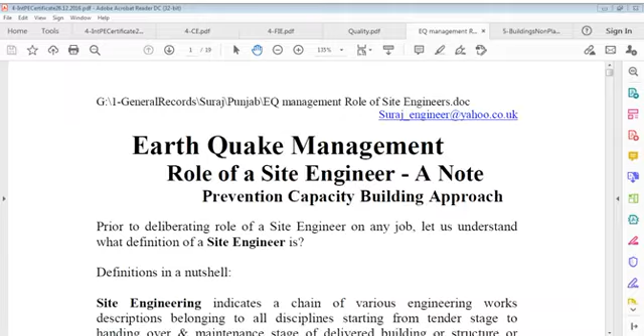We have certificates of all sorts, as I showed - this high profile certificate - and we claim that we are, but we are not. And we claim that we have certain roles in life, we dispose those roles, but should we, or do we? And of course, structures and buildings and all that.

This goes on and on, on and on. And like this, life keeps on moving on tracks of quality or no quality. That is a different aspect of life.

When I say quality, and when I say designs, and of course construction - so quality, design, construction. Do you think quality is available only in construction, or should it be available in construction, or should it be part of our life?

Construction, methods, time, performance. Methods - expressed detail, format for performance. Time - unchangeable. Cost - it may vary. Risks can be and must be foreseen. Reliability requires to be achieved.

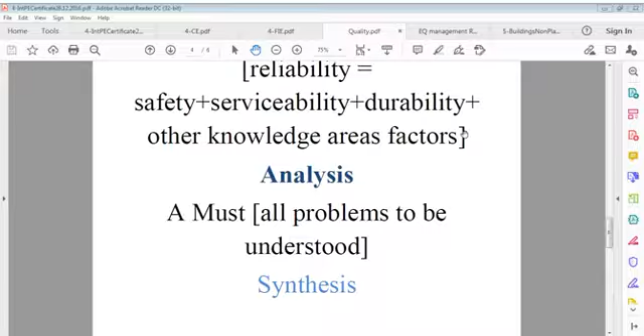But doctor cannot justify how could this respiration stop? How could this soul stop? No doctor can, no medical world can answer to this question. This means complete quality is unknown.

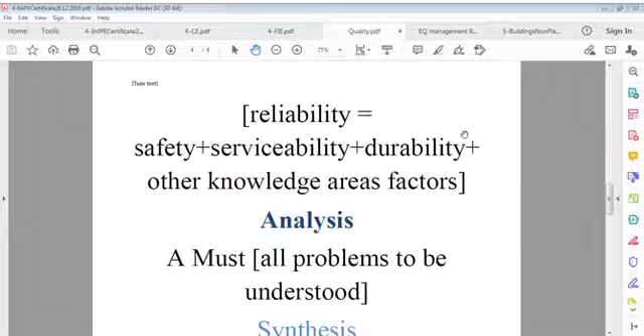If we can't analyze - we can analyze, but we cannot synthesize that. Doctor, medical world can analyze your body, everything it can do by testing, but it can't tell the answer. Can some doctor assemble this body? Answer is no.

Because it is not in the ambit of doctor or medical world that body can be revived. And body and doctor also cannot tell you what does that mean. No one can answer this question, because there is no meaning until we know that, we understand that.

We simply say, these test reports tell there is nothing in this. Breath has stopped, heart has stopped, there is multi-organ failure like this or like that. And body ceases functioning.

You can imagine by this what cost we have with us. Without payment, we have this value that God has given us. Risks and reliability both are there. If my body is healthy, it's risk-free, it works well, and it's reliable.

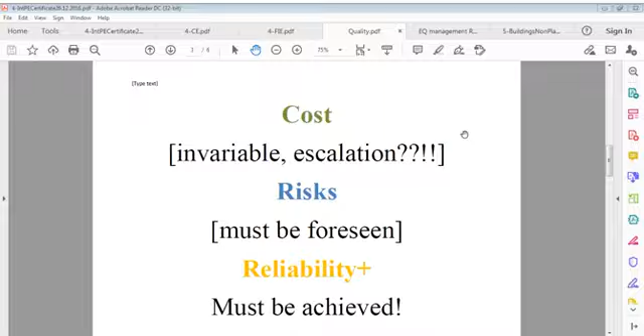That's a very important point. But we do not know the method by which this body was constructed. It's really very interesting to know how this body is constructed, using which design and under what quality system, which we can't know. I'm just giving you this based on only my thoughts of life. It's only based on thinking. Otherwise, I can't tell you. It's a very important point.

In the engineering world, a lot has happened in all branches of engineering that we name. When I was young, I did not know what engineering was, but I knew there were few engineerings at that time. Usually, an engineer was understood to be a person who produces houses or machines, or deals with electrical power. There were three engineerings: electrical, mechanical, and civil. Other engineering names were not known in those days. Later came automobile engineering, television engineering - we used to call them TV engineer, mechanic, all that type.

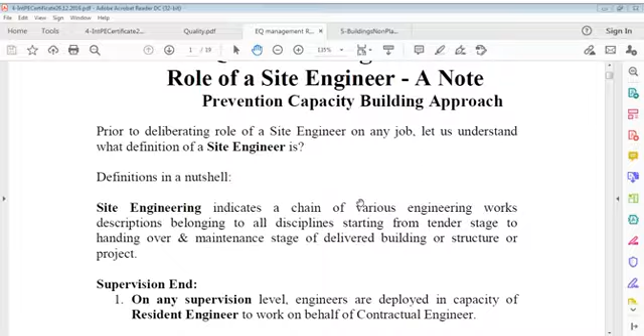The subject is different. I say, prior to deliberating the role of a site engineer on whatever job, we should know actually what is a site engineer. Is it the same term we use, or is it different? Just like we say engineer and engineering - what actually is a site engineer?

I can say you may say a person who works on site is a site engineer. You may say a person who develops is a site engineer. Yes, it can be. But I think site engineering indicates a chain of various engineering works.

Various engineering works, descriptions belonging to all disciplines, starting from the bidding stage or tender stage to the handing over and maintenance stage of a delivered building or structure or project.

It's like a workshop - you can say floor manager, floor engineer, who takes responsibility of completing all activities of floor work. You may say that site means a place. That's right, site means a place. We can with complete competency say that site is a location, a piece of land, a place. That's right. This means where work is done, that is site.

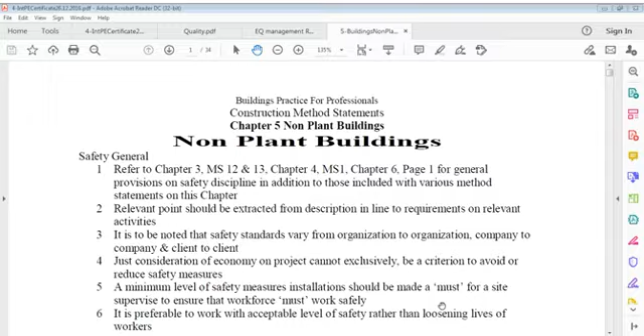We have to be very clear. Responsibilities, of course, do change, and we have to understand those responsibilities. What actually changes? We sometimes call them non-plant buildings, sometimes plant buildings. It happens, and no one can change it. It's not one, not two, but many roles are involved in those buildings.

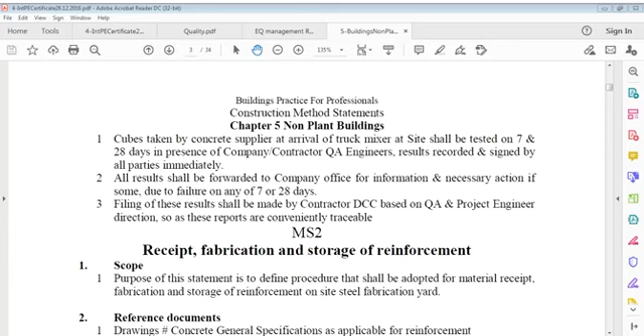No, I'm just saying supervision role and contractual engineer role, and also the construction end. Certainly there are two points in any work: one is construction, the other is supervision. Of course, on top of this, or before this, prior to construction, we have to design every project, without which the project cannot be started.

That design is a role of the engineer. It's a complete role of engineer, but here the design is to be implemented on site, and we call it design engineering work. Design engineering means it's pre-work of site engineering, but it's a part of site engineering itself, because without this, site engineering cannot go. You may say design is a lead engineering of site engineering. Design leads how to work on site, and without designs we can't do anything. That's also true. So design engineering is a role of site engineering.

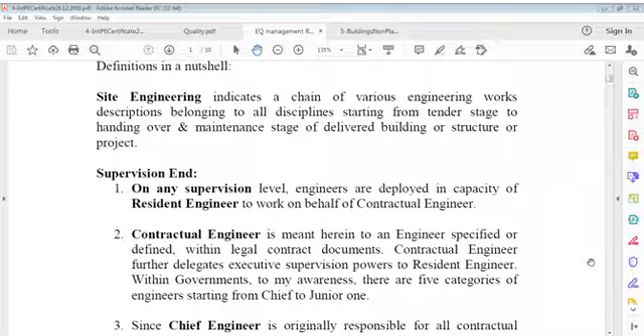When surveillance comes into picture, that is not that high a responsibility. But when supervision comes into picture, that is absolute responsibility. Of course, in work, not in contract. I'm not talking of contract here. I'm talking of responsible conduct, responsible behavior, which is a very important part of life. If I understand what is my responsibility and what is the responsibility of others, we can enhance our responsibility, we enlarge it, keeping abreast of project value.

It is, of course, responsibilities we define ourselves. Nobody else defines them. Therefore, that responsibility can be enlarged in the interest of work. As a supervisor, or as a higher responsibility person, it's my duty to make sure that whatever work we do, or the contractor does, must be more than in quality, enriched and delivered more than what we expect for.

But does it happen? If that could be so easy, there should be no such problem in quality. There should be no such problem at any level of quality. But it doesn't happen. This doesn't happen, and that's the point where we are weak.

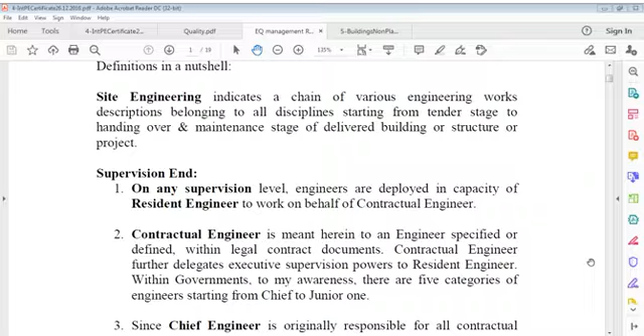When I say supervision, what does it mean? It means I am an engineer who has to make sure whatever someone else does is acceptable. That's what I think. It means I am a little competent, I have some degree of competency to decide that whatever I get, whatever work is done, that is appropriate. That's all supervision means.

This means that although it's not my responsibility, yet I can say, yes, this person has done all this work on site, and it complies with all requirements, meaning the activity, whatever is done, complies with the definitions, with extensions of definitions included in documents, or you can say drawings and specifications. That's what I make sure. And if it's not given, it has been done according to the good or prevailing industrial practice.

And when I say that's my job to do like this, I have to report this to my real supervisor, my absolute supervisor. I'm a relative supervisor, I'm a delegated supervisor, but my original supervisor, who is responsible for this design, for this project, is responsible to make sure whatever is spent on this project is really brought back in terms of quality of work, quantity of work, to whom we generally call, contractually, the engineer, who is responsible for the complete project, complete structure.

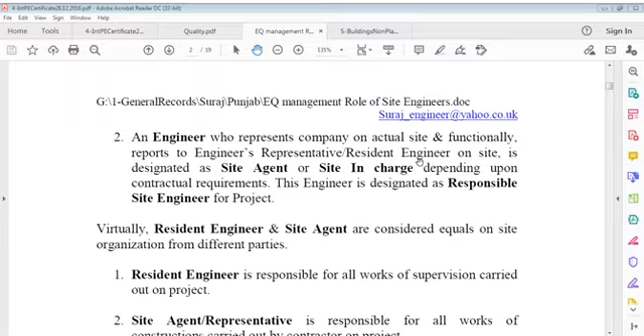Here I'm not talking of titles we give to such people - I'm talking of responsibilities. Just like on the construction end, project manager, leader or engineer, downwards to all levels, up to foreman, supervisor, and charge hand, working in whatever construction contracting company - these designations are factually responsible for achievement of project construction execution.

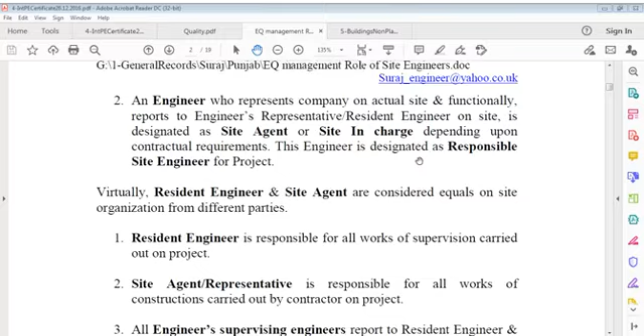Engineer - an engineer who represents the company or organization on the real site, the actual site, and functionally reports to the engineer's representative or resident engineer. I'm talking of that person who works on behalf of the contractor. Certainly that person is the site representative of the contractor, and that person must report to the representative of the site.

That person who has such high profile on behalf of the contractor can be called site agent or site in charge, depending on what's practice and what's required by the contract. The term doesn't matter - responsibility matters. Generally we call it the responsible site engineer or site agent.

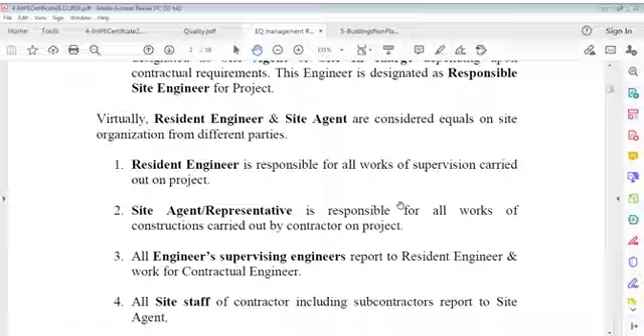Construction is very complicated nowadays, and most important is the element of RCC, reinforcement concrete. You can say for accomplishing RCC, which is in foundation as well, knowledge of existing soil formation strata and below many stratas counts a lot in implementation of such requirements.

Concrete is a material that can't be controlled chip by chip, stone by stone, or particle by particle. Reason we know - thunderstorms everywhere sometimes, floods everywhere sometimes, or even bombing by those who are against humanity. We have to realize this fact. We have to evaluate this fact.

Cost, time are spent, and if quality is not achieved, what is the value of being an engineer? There is no value of being an engineer. It is the duty of the site person to leave no stone unturned while doing work and complying with the requirement of designs. The best person is one who delivers more than expected.

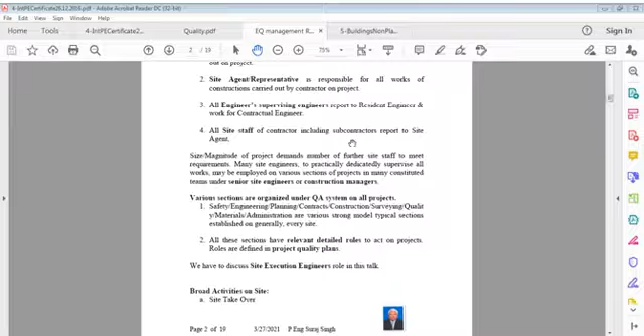Site construction is really an extraordinary understanding. If you understand this extraordinarily, we can get a lot. We can get many answers, many views on this.

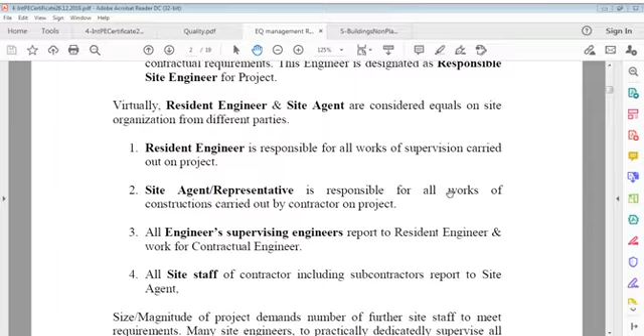And here, what we said -- these are very important factors, considerations. We can see various levels of engineers are involved in that, but my point is not that. It's a different kind of consideration, a different kind of view.

Roles are defined in project quality plans, and we have to discuss those roles in our talk. Now we know that every project involves planning, mobilization, surveying.

This is very important: planning, mobilization, surveying, start, kick-off, construction, quality supervision, completion, maintenance. Planning -- now planning has also got many meanings.

Site planning we are talking of. We are not talking of national planning or international planning, or you can say budget planning or something. We are talking of site planning, construction planning, and that means mobilization exists, surveying, start, kick-off, construction.

Construction is a very long process. Quality supervision, completion, maintenance -- we can say all this.

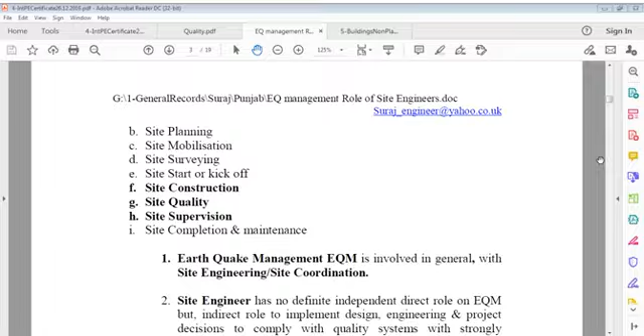And earthquake is just a title here because there's rules in that talk. It's site engineering coordination, and we can say site engineer means has no definite independent direct role, but an indirect role.

To implement design, engineering, project decisions, to comply with quality systems, with strongly extended base support by all responsible discipline sections. It's a very important point. We can't go against that.

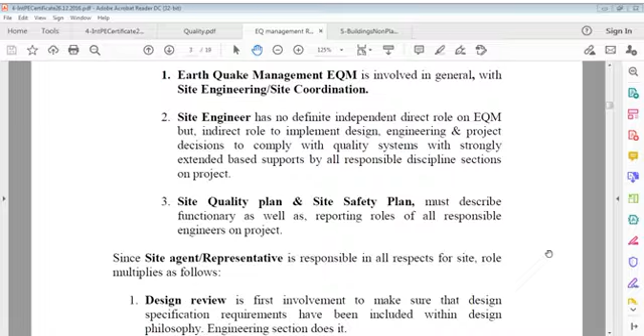Now, site quality plan, site safety plan must describe functionary as well as reporting roles of all responsible engineers on the project.

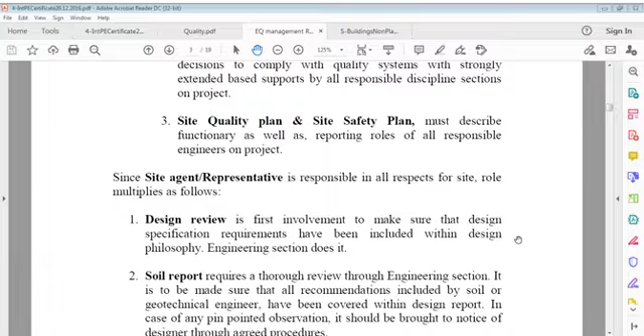Site quality plan and site safety plan must describe functionary as well as reporting roles of all responsible engineers on the project.

Now let us say design review, which is a job of site as well. They are responsible engineers deployed on site. Review is the first involvement to make sure that design specifications and requirements have been included within the design philosophy.

Engineering design section does it. It doesn't mean we have to check design's theories or design's application analysis. It's not that. Design review doesn't mean that. Design review means a kind of study in which we have to make sure there's nothing left in this without which construction cannot be done.

And of course, to make sure that it's acceptable in a way -- you can say it may be structural steel, it may be RCC, or it may be whatever else -- there's no problem in constructing that.

No major problem is caused. It doesn't mean we are doing scrutiny, or proof surveying, or proofreading. It's not that. It's a review, a coordination review, you can say, a coordination review.

We're not going to check what the design has done, but to make sure we should not face any specific difficulty that can stop work, that can cause hindrance in pushing the job.

That's the kind of study, because we don't have details of designs with us. We don't have those stress analyses, and we are not interested in that as well.

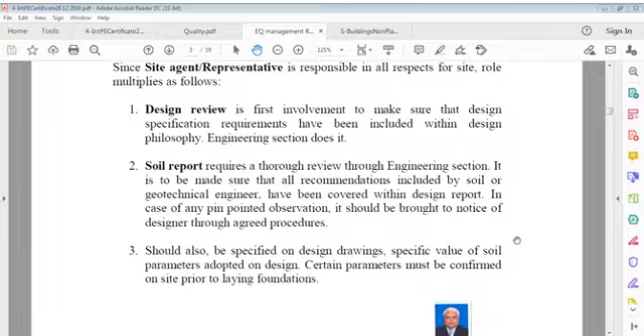It's to make sure that all recommendations included by the soil or geotechnical engineer have been covered within the design report. In case of whatever pinpointed observation, it should be brought to notice of the designer through agreed procedures. So design review, also soil report review, both are very important. Design has direct relation to soil report as far as foundation is concerned, particularly the foundation portion. And if soil report and site conditions are different, question must be raised.

Sometimes it happens that the soil engineer has not given proper attention. The site person knows there can be a lot of difference, and sometimes it is well done. Whatever happens, if there's a doubt, we shall raise this doubt as a site person to the designer or to the soil engineer and question it. It's a part of coordination, it's not a part of domination.

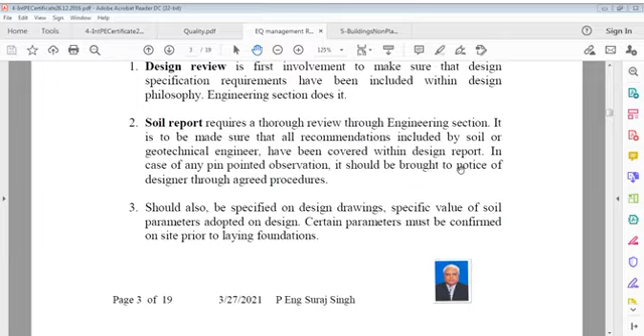Also specified on design drawings, the specific value of soil parameters adopted in design must be verified or confirmed prior to laying foundations. Or in case the localized soil does not allow those design parameters, then a question is raised and the design be reconsidered.

Now the site engineer has to conduct this test in all major areas of site. Site engineer conduct means has to involve in that test with the laboratory, and the site quality engineer must involve for quality accuracy of the test. Whatever variation from the soil report must immediately be reported to the soil laboratory and designer, and it must be the supervisor's or resident engineer's responsibility to make sure that the testing system complies with standard procedures.

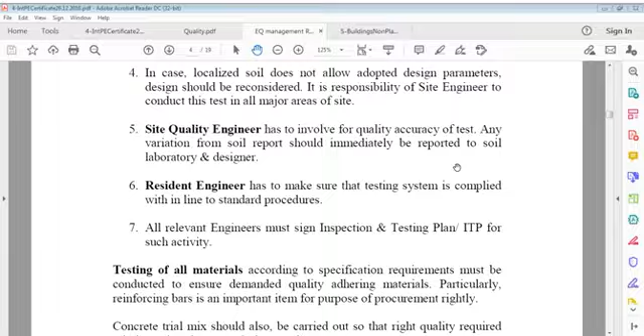Now all materials are tested according to specification requirements, to ensure that quality complies with requirement. Particularly, reinforcing bar is an important item for the purpose of procurement.

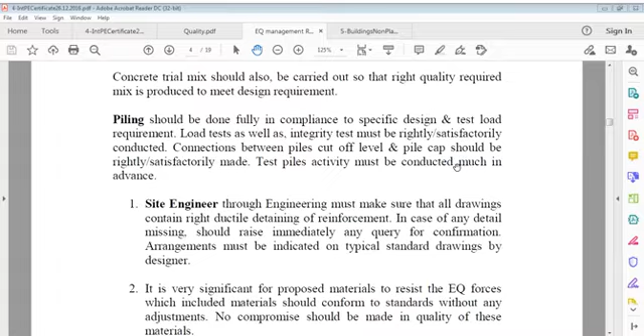Concrete trial mix must be carried out if it is not immediately available. If it's available, that can be considered, but in certain cases, in remote areas, concrete trial mix should be carried out. It takes time, of course, but once it is done, the right quality, required mix, is produced to meet design requirement. Nowadays many projects have been done and many data are available which can be considered if it's a small project or we can't afford a trial mix. But if we can afford it, we should do this. Otherwise, standards are available and we can adopt them.

The issue of piling comes in. It should be done fully in compliance with the specific design and test load requirement. Test loads, load tests, integrity tests, all must be rightly and satisfactorily conducted. Connections between pile cut-off level and pile cap should be rightly and satisfactorily made. And these pile tests must be conducted much in advance.

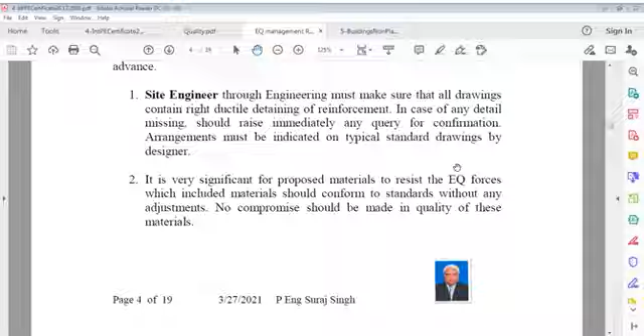Site engineer through engineering must make sure that all drawings contain the right ductile detailing of reinforcement. In case of any detail missing, must raise immediately whatever query for confirmation. Arrangements must be indicated on typical standard drawings by the designer. It's very significant.

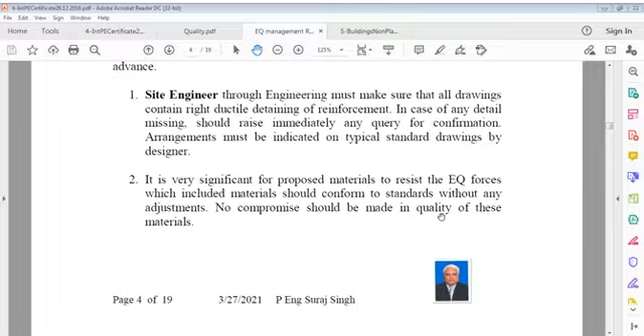For proposed materials to resist earthquake forces, the included materials should conform to standards without any adjustments. No compromise should be made in the quality of these materials. Generally it's RCC that's often included in various buildings and is certainly considered for designs. It's significant to produce concrete works with good quality, and no batch of concrete should be allowed to be poured unsupervised - no batch, even.

We know that every batch of concrete is different. You have to keep that in mind. Though it's from the same batching plant, there can be variations, though within limits. But we must be sure of everything.

It must be ensured that whatever precautions are required to be taken on site should have been explained to all responsible skilled craftspersons as well as those leading at the front.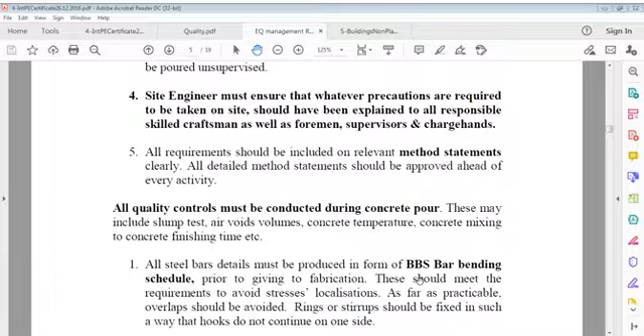All requirements should be included on method statements explicitly and clearly. All detailed method statements should be approved prior to ongoing activities, ahead of every activity.

All quality controls must be conducted during concrete pour. These may include slump test, air voids volumes, concrete temperature, concrete mixing to concrete finishing time, and whatever else is required.

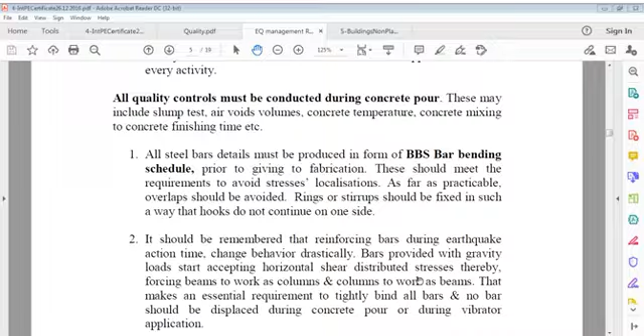All steel bar details must be produced in the form of BBS prior to giving to fabrication. Whatever BBS you use - BS 8666, BS 4466, or your own - depending on your choice or work practice, that must be known to all fabricators, prior to giving to fabrication.

These should meet requirements to avoid stress localizations, that you have to decide. As far as practicable, overlap should be avoided. Rings or stirrups should be fixed in such a way that hooks do not continue on one side as precautionary measures.

It should be remembered that reinforcing bars during earthquake action time change behavior drastically, because the force of earthquake doesn't come vertically alone, it acts in all directions. Bars provided for gravity loads start accepting horizontal shear, though it's not 100%, maybe 25% of vertical load, distributing stresses thereby, because the horizontal seismic action generally goes up to 0.25 of direct weight, equivalent I can say, not exactly.

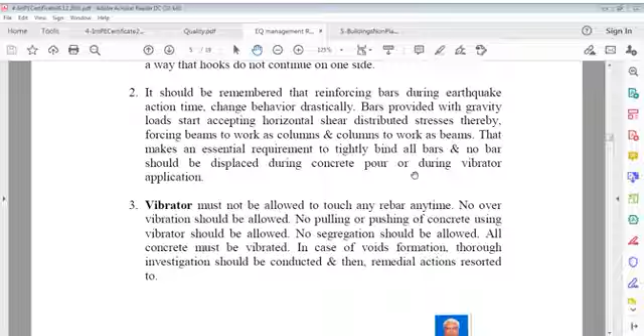It should be freely used without touching any other material. The vibrator must not be allowed to touch any rebar at any time. No over-vibration is accepted, no pulling or pushing of concrete is accepted, no segregation is allowed - all concrete must be vibrated. In case of voids or void formation, a thorough investigation should be conducted, and then remedial action resorted to.

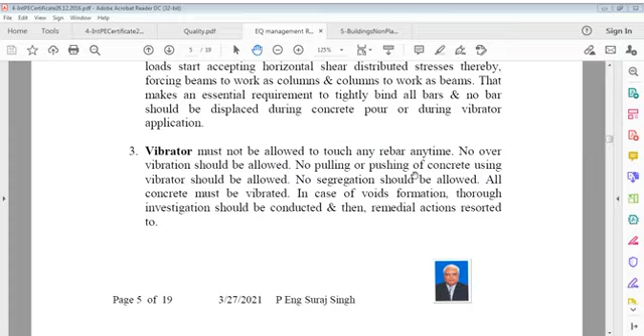Proper inclusion of concrete spacers, which we call covers, should be made at the right locations. Rebars must keep intact during the pouring activity, that must be kept in mind - reinforcing bars remaining intact during pouring is a very important point. If rebars are displaced or dislocated, then the purpose of the rebar is defeated.

It's generally been noticed that this item is neglected by engineers as well as other persons, and people don't care for spacers. I've seen many buildings being constructed without even spacers. That's not acceptable. They don't understand the meaning of concrete cover, concrete spacers. Because of that, they think it's just practice, they don't know the real meaning of it. And they don't want to know either, because those people are not engineers, they just want to do their business and think it's nothing.

I've seen some people using brick bats in place of concrete covers, and also plastic covers are used these days. But I prefer, as an engineer, that we should use only pre-cast covers, our own site-cast covers, not even purchased ones, because site-cast covers remain the same family as the concrete. And it's very easy to do.

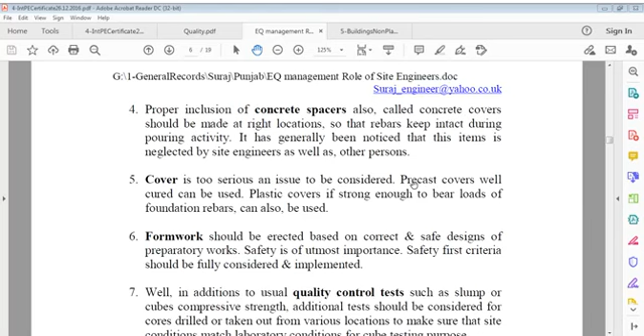Cover is too serious an issue, which is to be considered accordingly. Precast covers, well cured, can be used. Plastic covers, if strong enough to bear the loads of foundation rebars, can also be used. People don't understand this - why do we provide covers? They don't really understand, but engineers can understand. But engineers are not employed on every building. That is really too bad a practice.

I'm not here to criticize someone, but it's better if you use covers duly cast on site. The purpose of cover is different. First of all, whatever the cover is - 20 mm, 30 mm, 35 mm, 40 mm, 50 mm, whatever - it helps the concrete so that water is not penetrated, moisture is not penetrated, at least not to the steel itself. If it has to penetrate, it has to travel the distance of the cover, the clear cover.

And not only water - of course water is related to corrosion - but when I'm talking of fire time, suddenly or unexpectedly or by accident your structure is on fire, that's the most important time when we can say the value of covers comes in. Your cover may be, in superstructure, 30 mm for beam or more, column may be 40 mm, for slab may be 25 mm. We have to keep in mind that fire is such a danger, a hazard that can cause collapse of the whole structure if it impacts the structure adversely, and if within minutes or hours fire tenders don't reach, the structure can collapse. It's a very important part - more cover is better in fire resistance, firefighting.

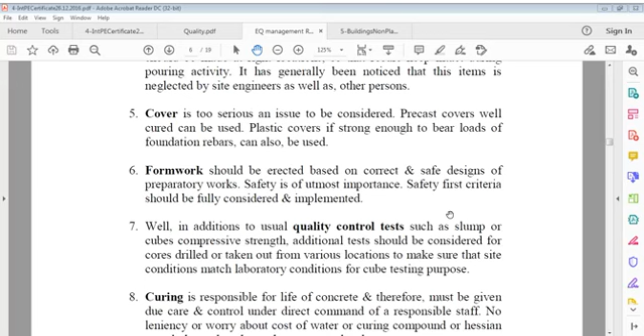You can see columns bulge because of bad formwork or formwork support. You can see slab formwork collapse or open up. You can see wall formwork open during pouring, or it can happen in beams as well. So proper arrangement to keep formwork intact during pouring is a very important aspect of formwork design.

We have to use fluid mechanics, fluid pressure, to know how much we can use. I always give the example of weight of concrete, whether it's column, beam, slab, or whatever. Generally, loads are transferred to formwork from concrete and from people working on it. Temporary loads, preparatory loads, these are transferred to formwork, and formwork transfers them to the supporting system.

These loads can be calculated very easily. There is no problem in that. Instant calculations, full calculations can be done for slabs, and part calculations can be done for vertical members like columns, because by virtue of time setting, their loads can be affected. It's not a big issue, it can be done.

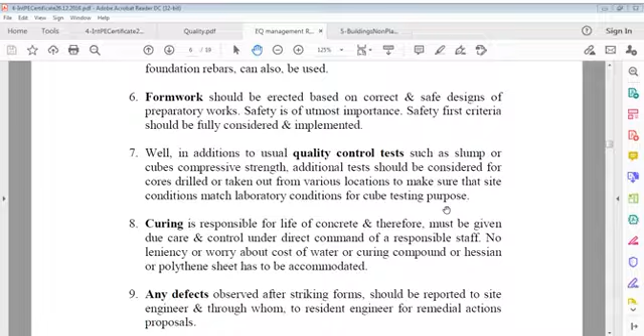It's an important way. We can't depend on compressive strength of cubes only to prove our work is fine. Cube strength declares the work is according to specification compliance, but the fact remains that whatever we do on site, on slabs or columns or any concrete members, that is in natural conditions. No artificiality is there. Site is exposed to nature, but the cube we test is not in natural condition, it remains in a tank of water or other controlled conditions.

Those conditions vary extremely from each other. Site conditions are real, laboratory conditions are controlled. So neither can represent the other. We have to keep this in mind.

Both are different. Either you keep cubes on site so they remain in the same condition as site, or when you cure site concrete, you cure the cube the same way, so they represent each other. I've done this many times. Though it's not written in codes, I did it because some consultants wanted it intentionally.

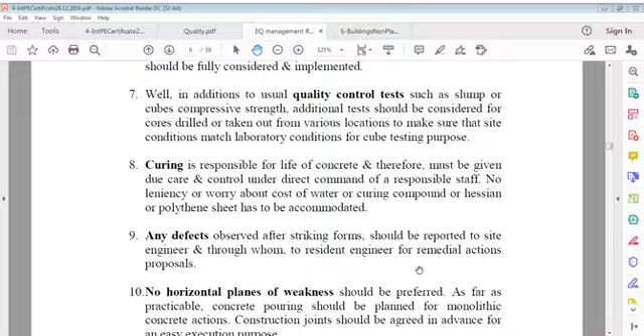No leniency or worry about the cost of water, curing compound, hessian cloth or polythene sheet to be accommodated. Why worry about that? Curing is a must, and a must is a must. Without curing, concrete fails, and there is no alternative solution if curing is missed.

Tell me if there is some solution and curing is missed, and why it should be missed. What you save by missing curing, that's the point to be understood. If I spend money on curing, how much is it? If I don't spend that money, how much can I save? And what is the solution if curing is missed? And what is the loss if curing is not missed? These points are very important.

First of all, we should not even think of missing curing, because concrete is not self-curing. Curing is, we know there is a disease, that's why we cure. So we know the disease is there and we cure it. And it's conventional, this is mandatory. But people sometimes act negligently.

They are lazy, or they least bother about curing. They do not understand the meaning of curing. When you do not understand the meaning of curing, for you it is a waste of time, waste of water, waste of curing compound, because you do not know the theory of concrete. For you it is just wastage of time.

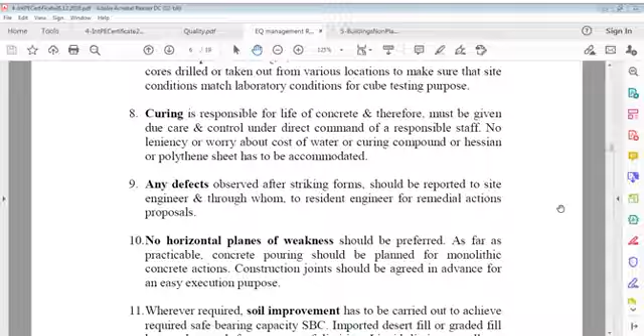Defects observed after striking forms. Whatever defects observed after striking forms should be reported to the site person, site engineer, and that must be decided between the site engineer and supervising engineer, how to remedy those defects, how to make good those defects.

Defects, of course, happen even after total supervision, even after in-depth, continuous supervision. It happens because hundreds of people work on one site, many hundreds, thousands, and many hands change. Your supervision cannot reach everybody. So defects are observed and can only be rectified, no other way, of course with warnings, but even then it happens because this is on site, this happens, every site it happens.

But it must be kept in view that defects are discovered, not ignored. I have seen people on sites put some Hessian bag on a defect, for what, I don't know. Declare, expose clearly, this is a defect, what's wrong with that? It's not your defect, it's a defect caused by someone's negligence, it's not your personal defect. Yes, on my site there can be any defect, what do I do? Only way is repair it, that's it.

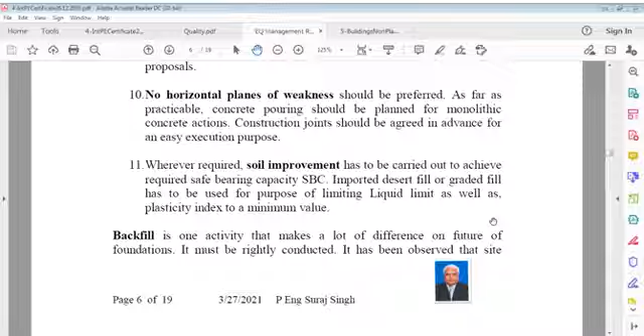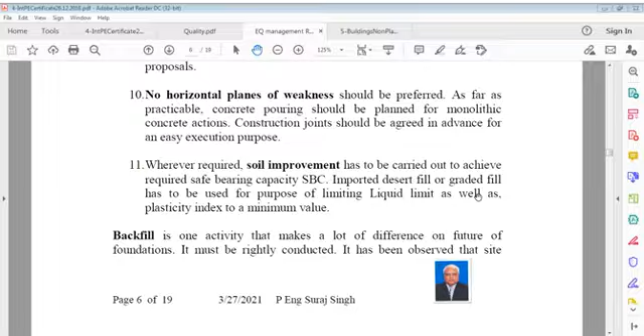Backfill is one activity that makes a lot of difference on the future of foundations and must be rightly conducted. It has been observed that site engineers try to neglect its supervision and save project time by filling thicker layers of fill. It's not a good practice. Backfill should be conducted in good compliance to agreed specifications to achieve 95 to 98% field density. General fill can be compacted to 90%.

Where I say 95 to 98% FD, this is backfill where structural load works. That's 95 to 98%, 98% actual, it may be more where your structural loading comes in, and in certain cases 95% is also applicable.

But when there is general fill, like landscape, like drainage line, where loading is not that heavy, you can say 90% FD may be accepted. But if engineered soil, graded soil in various places, in foundations and around foundations, there is requirement of 98% and must be achieved. It can even be more, achieved more, seen more than 100% in many cases.

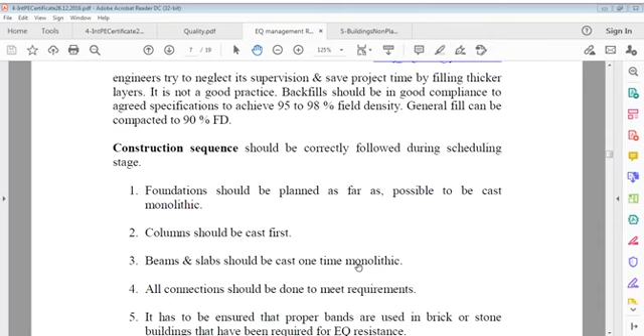Depends on what fill you are using, what sample is sent to laboratory for testing, what was the composition of that sample, and maybe the batch you filled in is stronger than that. So we compare it to that sample only, that's called FD. Percentage means percentage achieved by backfill density compared to that sample. So engineered fill is more important than else, engineered fill is better also. You must understand this point very well, engineered fill versus other fill from all aspects.

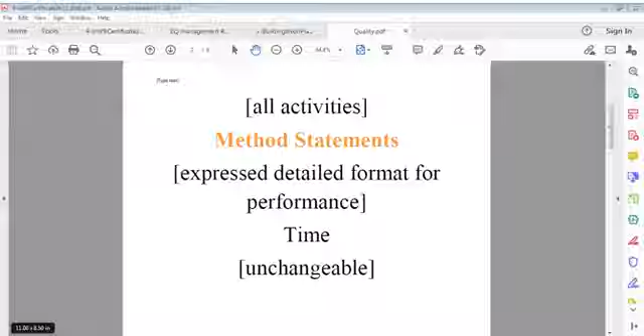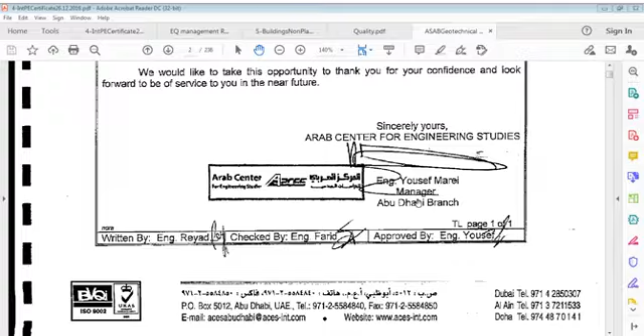It's a very long report. It can't be taken up immediately, but it's part of something. I just browse it and see. Let people see what I'm showing to them, let them see what I'm actually trying to browse on this.

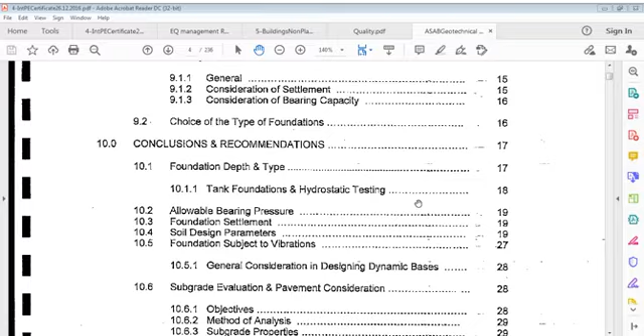This is from some laboratory, this is a practical one. It's not from a lecturer or a professor, it's from the practical world. It's giving so much information in this.

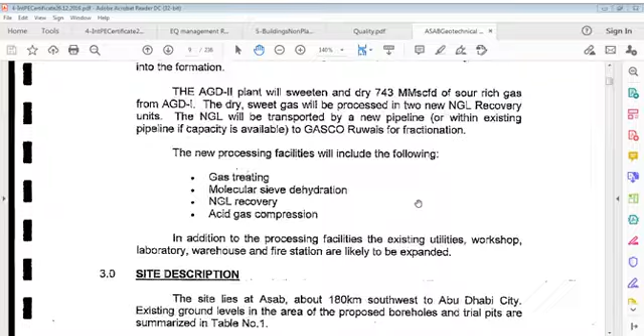I could not complete it last time. I'll do it again, but it's a very important one because there are so many reports, so many site reports in this report itself.

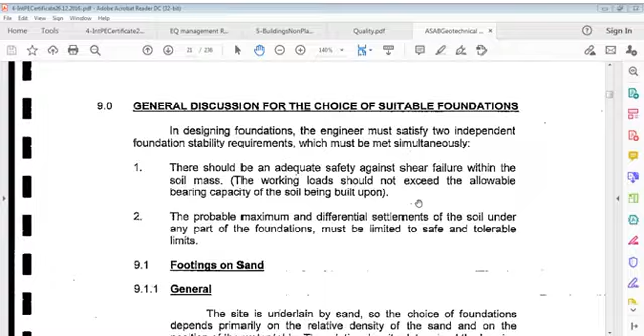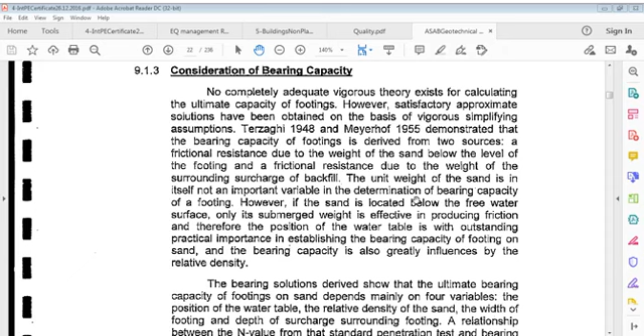No completely adequate rigorous theory exists for calculating ultimate capacity of footings. Satisfactory approximate solutions have been obtained on the basis of rigorous simplifying assumptions. Terzaghi 1948 and Meyerhof 1955 demonstrated that bearing capacity of footings is derived from two sources: frictional resistance due to weight of sand below the level of footing, and frictional resistance due to the weight of surrounding surcharge or backfill. Unit weight of sand is in itself not an important variable in determination of bearing capacity of a footing. However, if sand is located below the free water surface, only its submerged weight is effective in producing friction, and therefore the position of the water table is of outstanding practical importance in establishing bearing capacity of footing on sand, and bearing capacity is also greatly influenced by relative density.

Bearing capacity solutions show that the ultimate bearing capacity of footings on sand depends mainly on four variables: position of water table, relative density of sand, width of footing, and depth of surcharge surrounding the footing. A relationship between N value from the standard penetration test and bearing capacity was established; however, this relation is approximate.

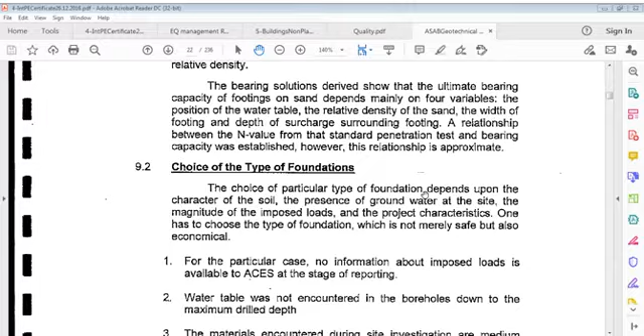Choice of a particular type of foundation depends upon the character of the soil, presence of groundwater at the site, magnitude of imposed loads, and project characteristics. One has to choose a type of foundation which is not merely safe but also economical. For a particular case, no information about imposed load is available. Water table was not encountered in the boreholes. This is a report only, this is conclusion, recommendations.

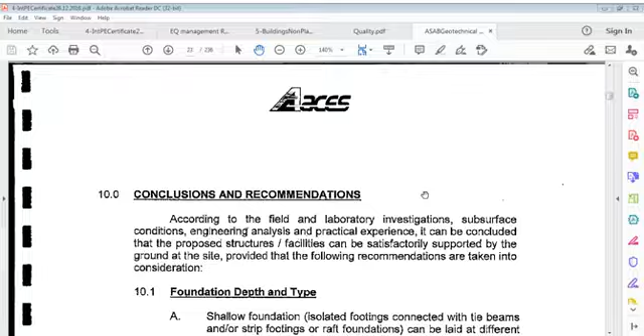Different types of reports are available for different types of foundations. Example, allowable bearing capacity for shallow foundations. Allowable bearing pressure was determined for the foundation ground as specified above using practical experience and results obtained from field standard penetration tests and empirical equations developed by Terzaghi and Peck.

Meyerhof and modified by Bowles, and taking into consideration a safety factor of 3 against shear failure of soil. Accordingly, the allowable bearing pressure values recommended to be used for design of footings with different widths and at different depths based on 25 mm settlement are presented.

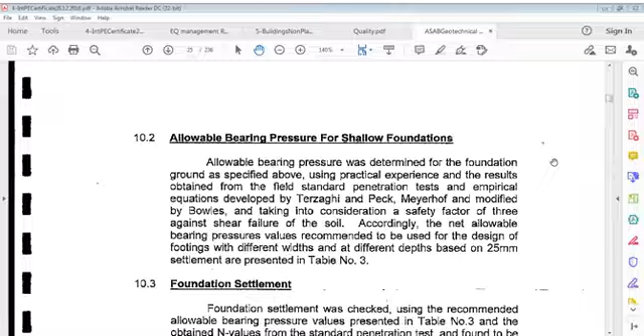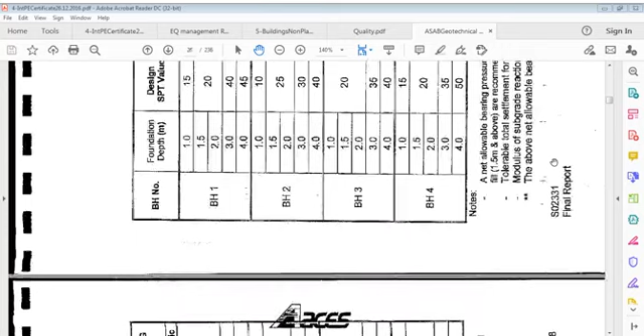So this is test report results. I'm just trying to show you what this is about, just trying to show you certain reports that I've shown in the past as well, just trying to show you, you can say here.

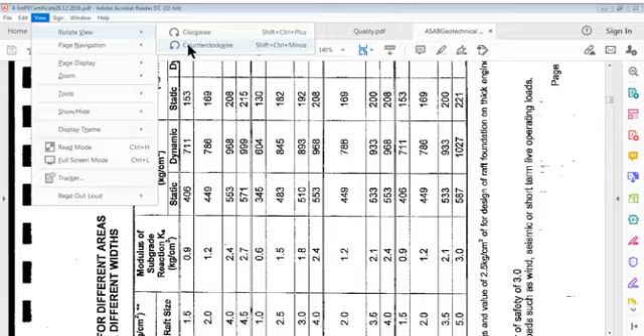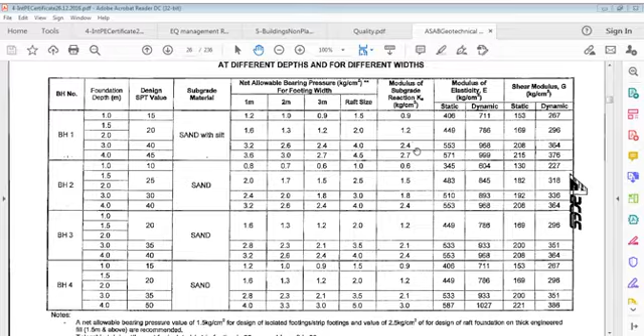My God, it is gone again, same way. Like this, this is different, at different depths and for different widths. So some we'll discuss later on. Of course, I've discussed already, but we'll discuss this later on in more detail.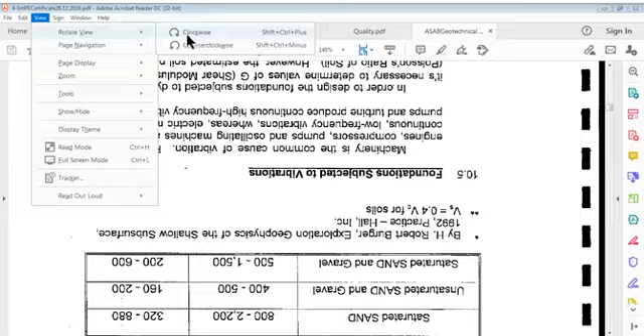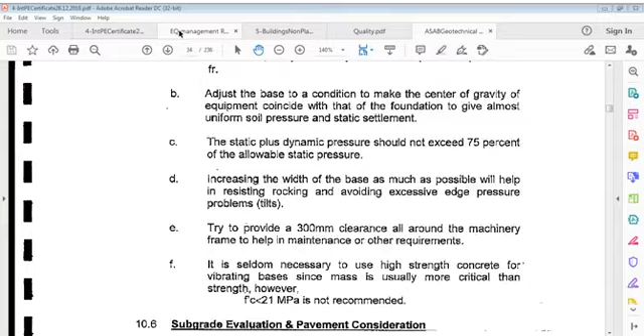Let me come back to the previous one. Sorry. Like this, there are so many reports, it's a long file as I said. It would even take time for this to be in that mode. Just now you can see, move on to this for various, I'm just trying to show you what this contains.

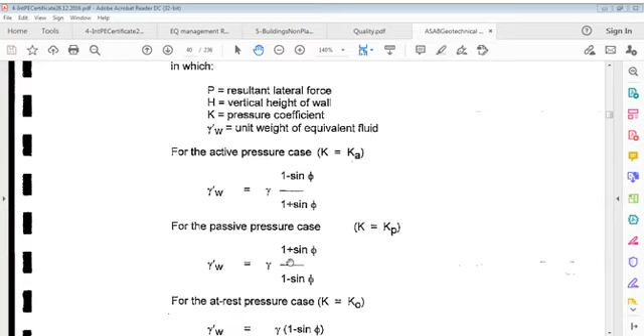As I said, structure fill I mentioned before. This was backfill material and compaction criteria, and now structure fill. In case structure fill under foundations is required, then the material to be used shall be free of organic material, organic matter, or other deleterious substances. Chloride content shall be less than 1%, and sulfate content 5%. Well graded granular mix with no particles larger than 75 mm and at least 80% of material smaller than 19 mm in size.

This structural fill: material passing sieve No.200 shall be less than or equal to 15%.

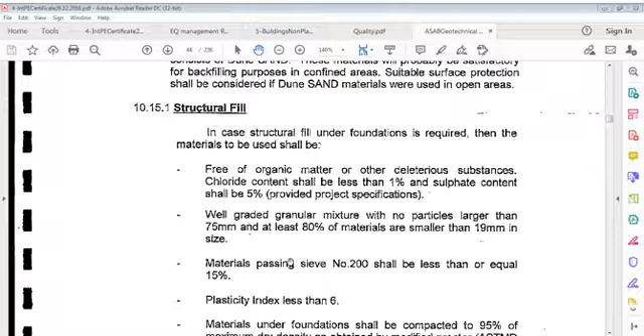Structural fill, you can see it's a general fill then. This is borrow sources.

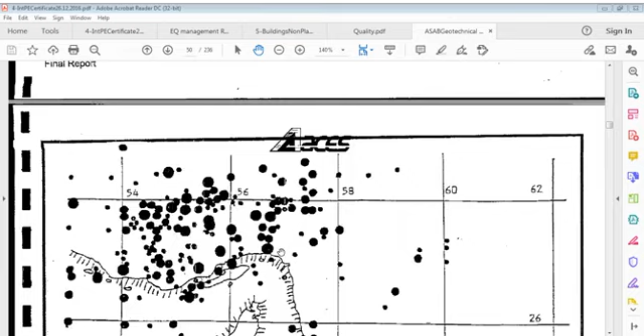So it is that. Alright, take it later on.